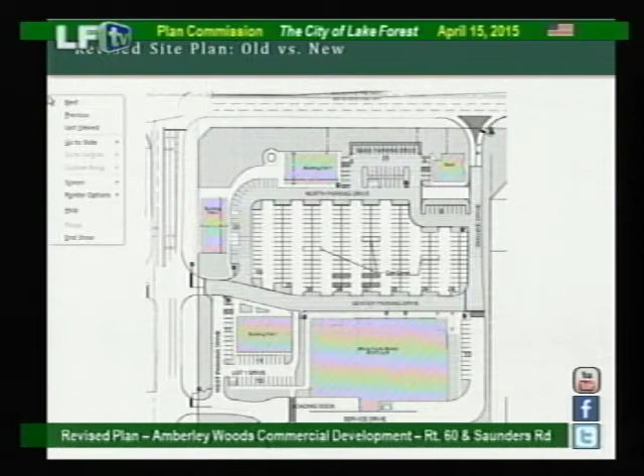This is the new plan. As you can see, much less dense. Originally 5 buildings, we now have reduced that to 3. We've also reduced the square footage by 10% of the GLA, to 62,793 square feet, a reduction of 6,697 square feet. The most contentious issue, as I mentioned, was a 42-foot setback from the property line to the parking area and a 60-foot setback from the property line to the building.

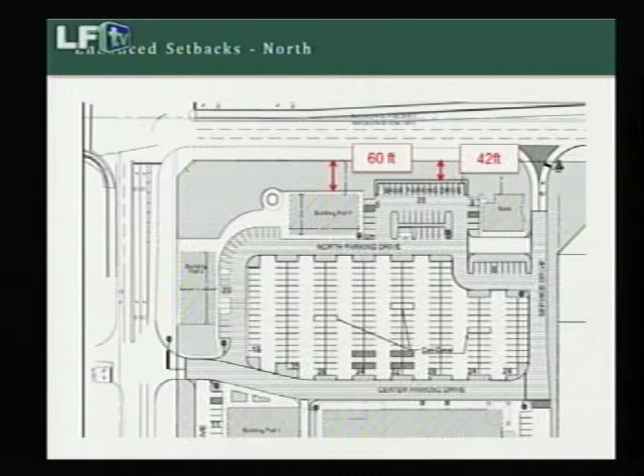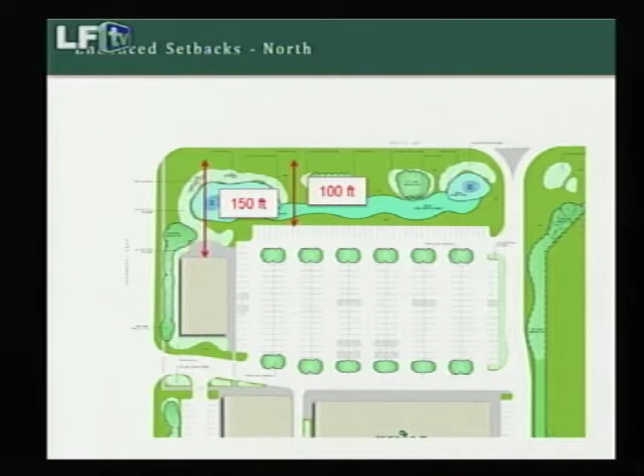The rear elevation originally was going to have 22 feet from the property line to the service drive, 47 feet to the rear portion of the building. We now have 50 feet to the rear portion of the building, and the service drive is now curved, with the setback ranging from 14 to 60 feet along that southern elevation.

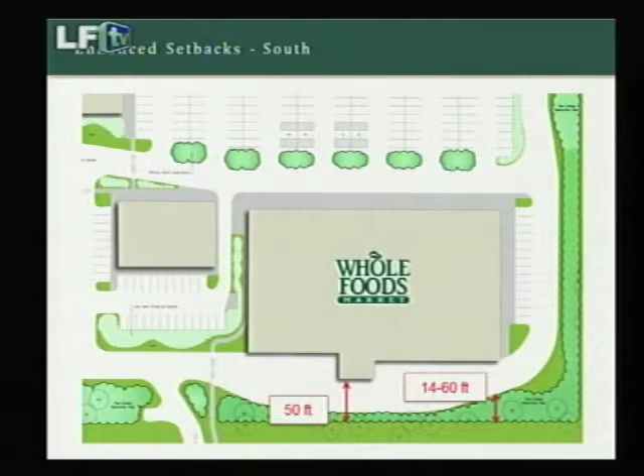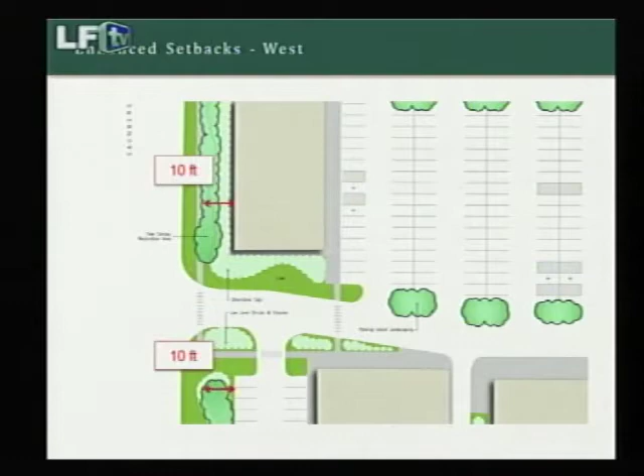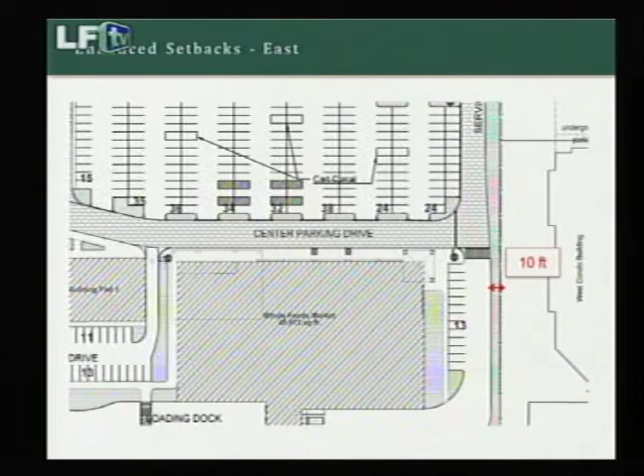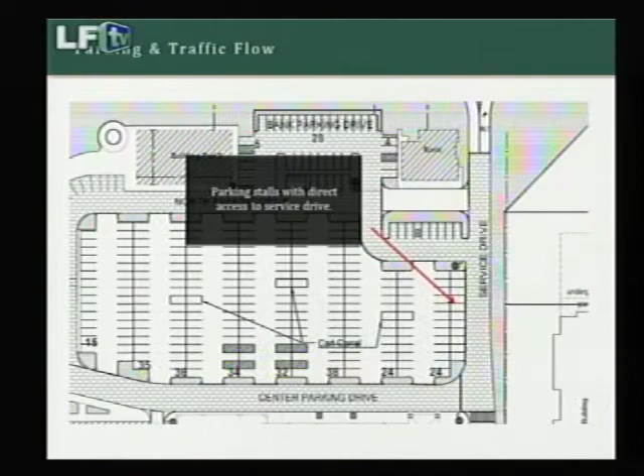Note also that the original plan had parking stalls along the service drive with direct access, which would have allowed vehicles to back up into the service drive, causing traffic congestion. We've now added a landscape island on the outside of that parking row to improve traffic flow and keep that service drive flowing freely.

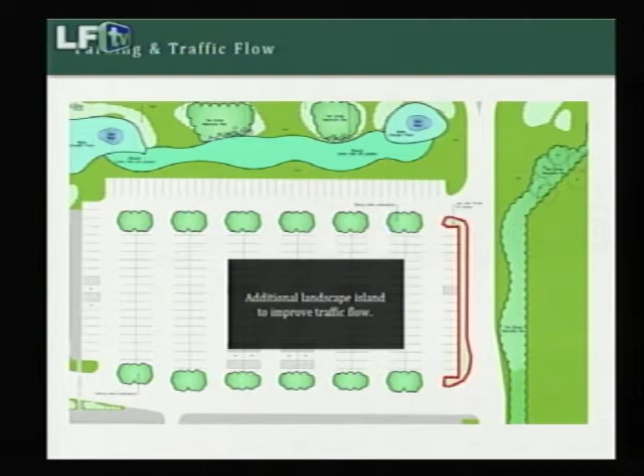We're proposing, in keeping with the last recommendation, that there would be a restricted access gate with a turnaround accessible for drivers approaching from Amberley Court. That gate would only be accessible with a fob key provided to residents of Amberley Court in the new homes that would be built, as well as in the neighboring condominium.

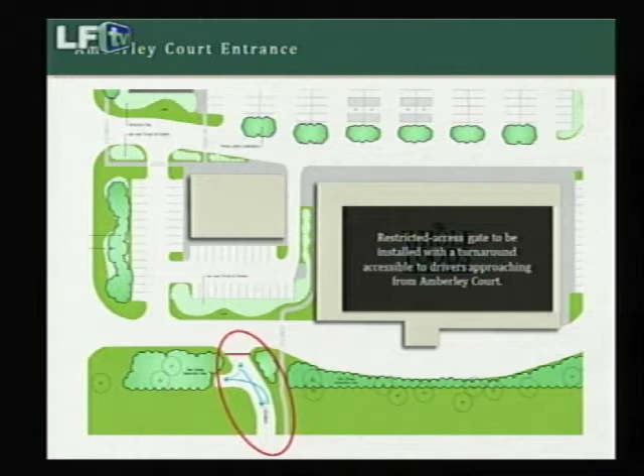That's a private street right now. It's anticipated that it would also be used by construction traffic during the construction of homes. But we also want to point out that we've provided for a cul-de-sac in the event that, after completion of those homes, the city determines that the gate is not functional.

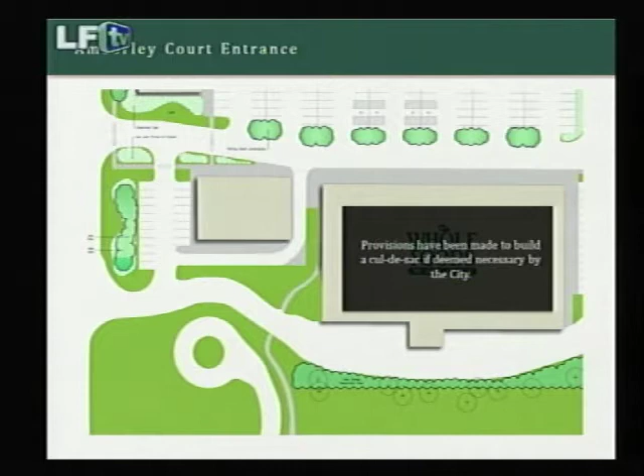So this cul-de-sac is not our preference. We lose a little bit of parking here, but it's being accommodated entirely on land that we own, and so this is something that would be an option somewhere down the road.

We also want to highlight that we've enhanced the landscaping and tree preservation pretty much all over the site, including 2 dedicated tree canopies along Route 60 that would allow trees to grow on Route 60 and keep foliage along that route.

Very importantly for a retail development, we've preserved view corridors by concentrating those trees in certain areas. This is an important consideration, that we can keep the tree canopy more lush than it was originally proposed, but also keep view corridors from Route 60 for the benefit of the retailers.

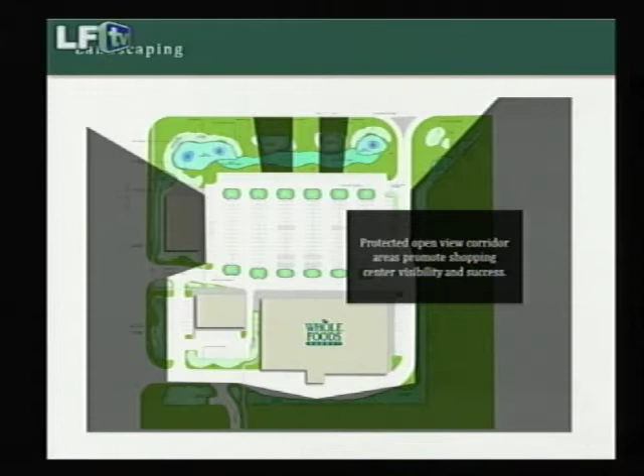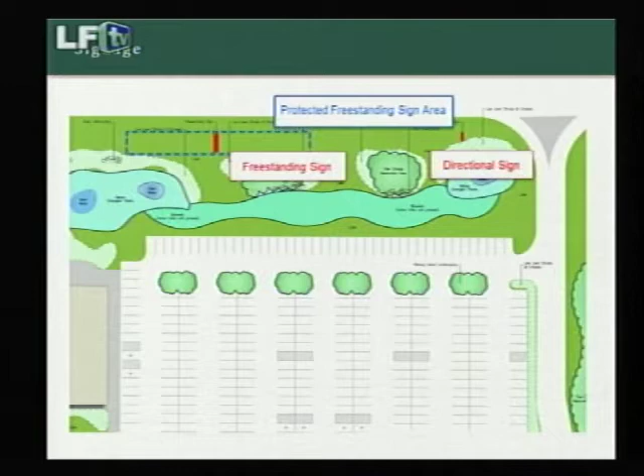The last consideration is signage. We're proposing one freestanding sign along Route 60. We've created a building envelope, and we would work with the city to decide the placement of that sign. That sign would be designed in keeping with the standards for that strip and with this zoning. We've also got a directional sign close to the right-in, right-out access off of Route 60, and another directional sign on the west entrance off of Saunders.

Those are all of the conditions that were suggested and that we've addressed. Happy to answer questions if you've got any.

Thank you, Chairman Lay. Just as background, in July of last year, the City Council heard a recommendation from the Plan Commission in support of this project with a number of conditions of approval. The City Council made it clear that they supported commercial development of this site. Just a reminder that this site, as it sits today, is approved for development with office buildings, so it's a site that we already know would have significant tree loss and significant impervious surface.

Since July, the developer who was at the forefront of this petition indicated there was no interest in presenting a revised site plan in response to the conditions. Since that time, the city has been in contact with the property owner. Several months ago we were put in contact with Pine Tree, and as a result you do have a revised plan in front of you tonight.

Since you already forwarded a recommendation, the City Council could have simply kept this petition at their level, but they felt that review of the site plan, because it is a land use issue, was important to be done by the Plan Commission. So they are forwarding this to you with the request that you review the conditions you previously recommended and evaluate whether this plan satisfies those conditions to a satisfactory level.

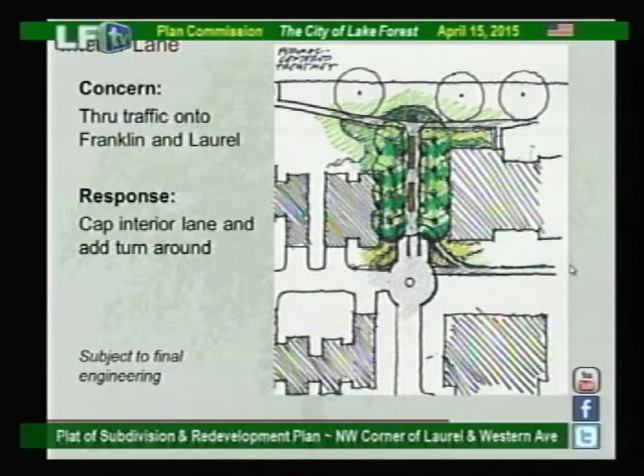The data from our traffic consultant finds this scenario somewhat unlikely, and we prefer the through lane from a planning and logistical standpoint. However, we did want to provide an alternate design that caps the interior lane with a turnaround instead of exiting onto Franklin, preserving pedestrian access by providing a similar formal promenade to the one we have on the east side of the site onto Western Avenue. We're still working through the engineering of this option, but wanted to offer it to the commission and the community as an alternative.

Another concern from the March meeting was about the size of the 4-story building, and how the height and density of the development would actually feel in the neighborhood. So we studied density, considered opportunities for height transitions, and modeled height to get a sense of the impact to the streetscape.

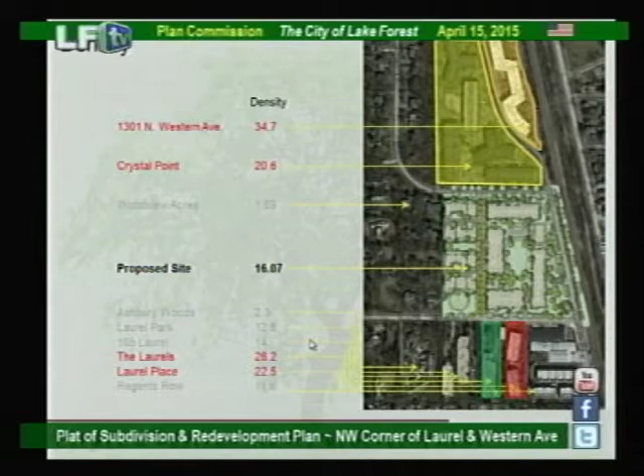This is a slide we presented at the last Plan Commission meeting. With 172 units proposed over 10.7 acres, our density is just over 16 units per acre. This is well within the context of the neighborhood—to the north, 34.7 units per acre at 1301 North Western Avenue and 20.6 units per acre at Crystal Point; to the south, the Laurels and Laurel Place have densities of 28.2 and 22.5 units per acre. So density is not the issue here.

Let's look at height. We studied several ways to drop the 4-story building to 3 stories while preserving the economics and scale necessary for the building and apartment product.

We could go to 3 stories by extending the building north, either consuming or not consuming the amenity building. We felt this made the building much too long, and with every building on site at 3 stories, it didn't achieve the richness that a mix of heights provides and that we originally intended.

We also considered going to an L-shaped building and jogging the footprint out into the 140-foot setback at the southeast corner. We found reducing height at the cost of public open space was unacceptable.

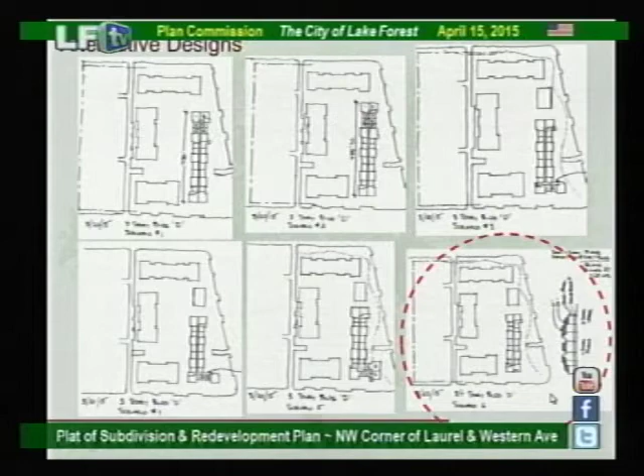The one alternative that worked was a tiered design, stepping down the wings of the building to 3 stories at either end. This approach maintains the original character of the design and the amount of open space, while softening the height at the ends of the buildings. So we modeled this alternative alongside the proposed 4-story buildings to gauge the impact to the streetscape.

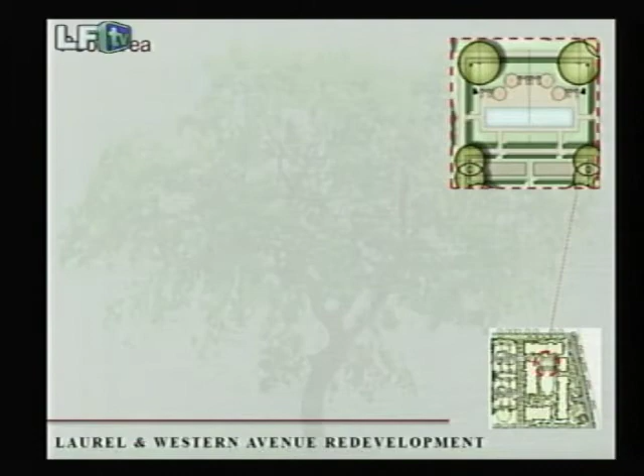To quickly touch from the interior of the site on the pool, we're proposing a pool as part of the outdoor amenity. When we say pool, we're envisioning a 75-foot, 2-lane lap pool, a minimum depth pool with a dark bottom that will look like an elegant estate pool, as seen here.

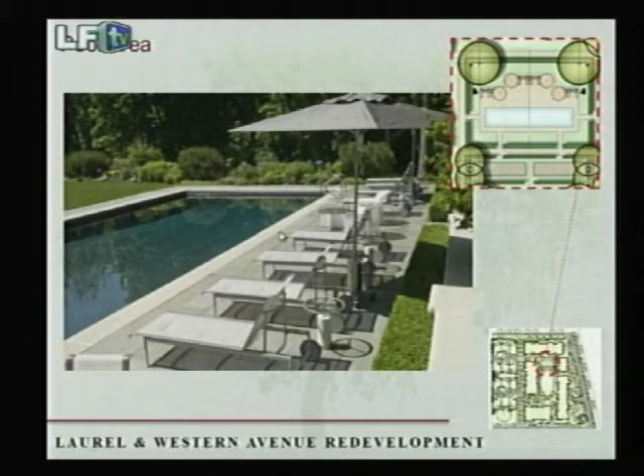We wanted to provide some information as to what the pool looked like in the off-season. Here you can see we've covered the pool with wood planks and provided a couple plantings on top to show that it's not just a stretched tarp over it, and there's some elegance that it preserves to this area.

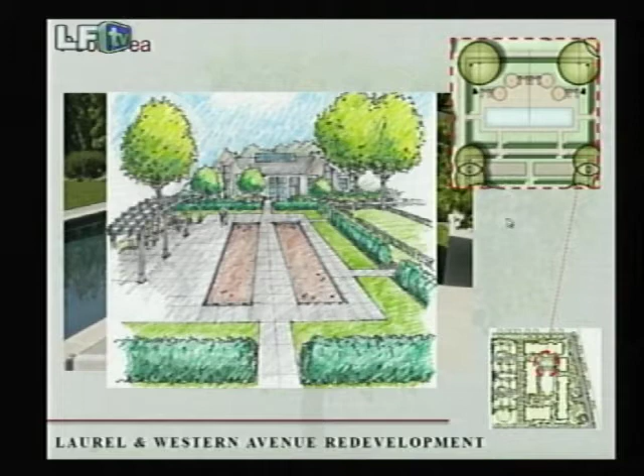We also wanted to share a no-pool scenario where we would move the bocce courts from the north end of the site down here into the pool area and then just extend the great lawn. These are just options in response to questions we heard.

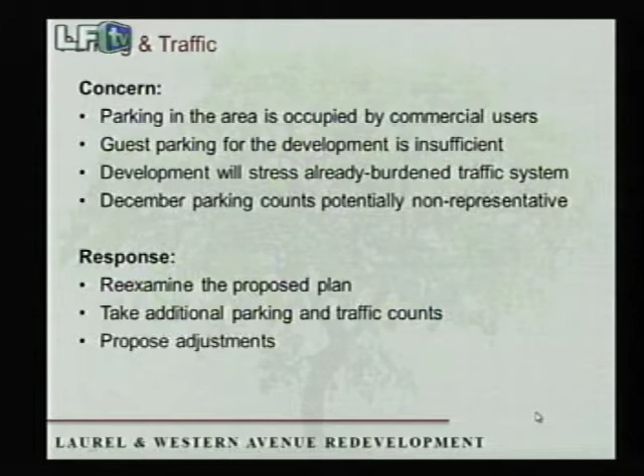And then finally, we turn to parking and traffic. We heard questions from the community about how the development will impact traffic and parking in the area, concerns that the parking is needed by adjacent commercial buildings, and that traffic and parking counts captured in December were not necessarily representative of true conditions, since many people vacation in December. In response to these concerns, we re-examined our proposed parking and took additional parking and traffic counts in March to see if we need to make adjustments.

For the condos, we're providing 36 indoor spaces and 6 outdoor spaces for the 18-unit building. For the 24-unit building, we're providing 48 indoor spaces and 8 surface spaces. This is a total of 98 spaces proposed for the condominiums, while only 89 are required, so we are in excess of the code requirements for the condominiums.

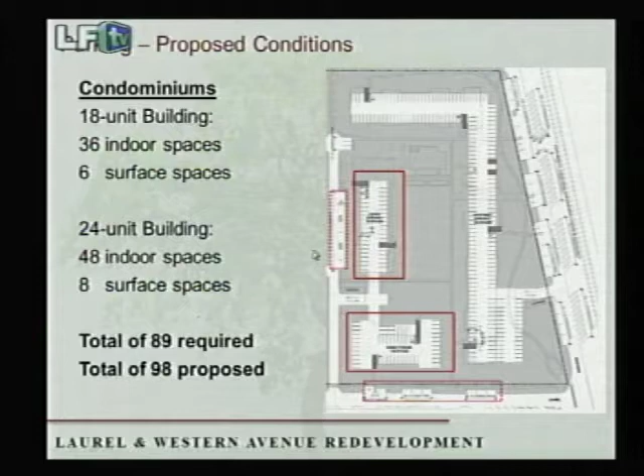For the apartments, we're providing 192 indoor parking spaces under both buildings and the amenity. We're also improving the existing 42 spaces on Western that are already there and adding 17 new spaces, for a total of 59 improved spaces being funded through this development. The question really is, can parking on Western Avenue serve both the district and the development?

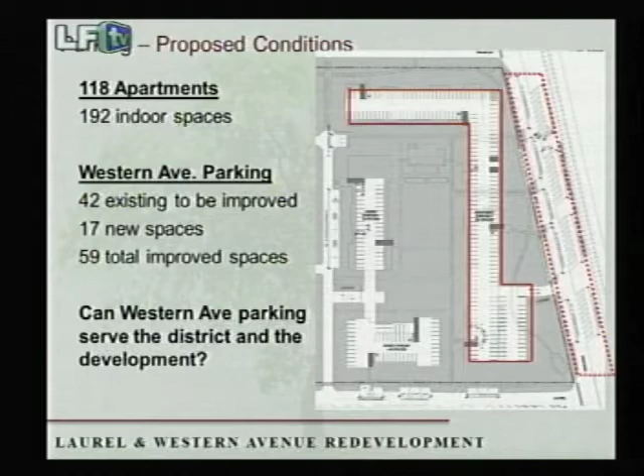To answer that question, we'll re-examine the data from our parking study. The original study was done on a Thursday in early December. It took counts between 11 a.m. and 6 p.m. and found that of the 190 spaces in the district, 39%, or 75 spaces, were occupied at the peak period of 1 p.m. So over the course of the entire day, the most occupied hour was about 1 p.m., and only 75 spaces, or 39%, were occupied.

After the last meeting and in consultation with city staff and our engineering consultant, we sent KLOA back into the field in March to study demand in spring versus winter. They expanded their scope to cover a weekday and a weekend to understand the patterns, and extended the time to 9 p.m. based on feedback that they should capture additional parking impacts during the dinner hour. KLOA found exactly the same peak period for the Friday count as the December Thursday count, with a peak period at 1 p.m., 39% or 75 spaces occupied.

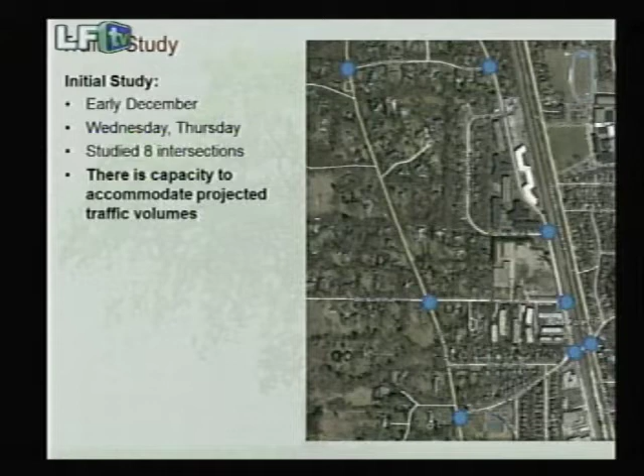Similarly, KLOA consulted with the city and went back to the field to study traffic conditions at the Woodland, McKinley, and Western intersection to gauge whether there was a perceptible difference between the data captured in December and the conditions in March. They again extended the counts into the weekend, and found that the March data largely compared to the December data, confirming their initial finding that there would be no significant impact from this development to existing traffic conditions in the area.

We have KLOA here tonight to answer questions, along with members of our design team. We have additional information to share, but thought we'd stop here to provide ample time for the rest of the evening. Thank you.

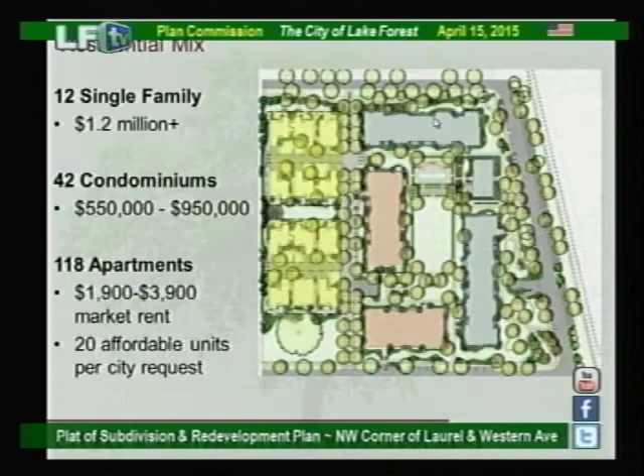Since we're using the replacement of Franklin Park as one way to satisfy the RFP treatment of Franklin Park, we wanted to provide a design that was more reflective of what Franklin Park currently looks like. Franklin Park currently has a curvilinear sidewalk that meanders through it and around it before it wraps back around and heads back west on Franklin. We thought that curvilinear aspect was desirable, changed the feature of the site, and made the exterior pieces seem more inviting and park-like. As we carried Franklin Park down to Laurel, it seemed appropriate to carry that treatment with it.

We are really providing this as an opportunity to integrate the site with the community and have people enjoy the incredible amount of landscaping and the park-like setting we're providing. So that's a little bit about why we chose the curvilinear expression and meandering path - it's a park-like experience that's more reflective of Franklin Park today.

Okay? Well, thank you. Yes, of course.

I've got a couple of questions - it's more of a day in the life question. Could you walk us through just an average apartment dweller driving in for the day and coming out, and also when they move in, when they move out, garbage delivery, all those daily functions, and how that would fit for the different types of uses, the apartments as well as the condos, because those will take more traffic than the single families.

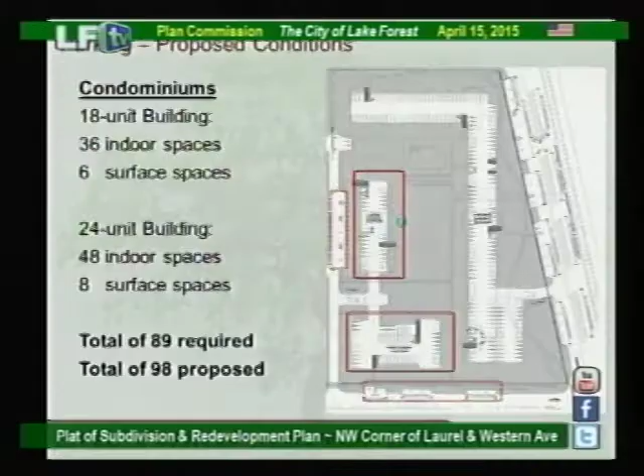We'll start with the apartments. As I had mentioned previously, going down to the parking plan, you can see we have a significant underground, fully enclosed, heated garage that serves residents in the apartments. Ideally the person is parking there at night, leaving in the morning to go to work. They would leave through the ramp that exits onto Western. This ramp was previously shown off of Franklin; it was relocated to reduce traffic impacts on Franklin, to Western. That's the only entrance and exit for the parking structure for the apartments.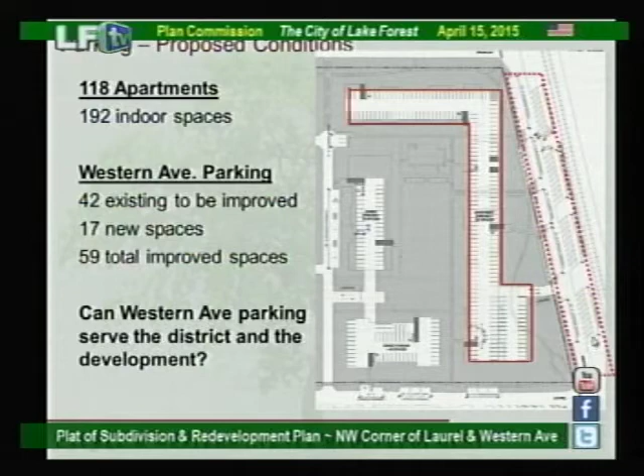So somebody will leave this ramp, head either north or more likely south to the city center, if they're driving. We think there's going to be quite a few commuters here, in which case they would leave through the front door and continue south perhaps to the Metra stop in the heart of town, or if they're running out for an errand.

So we've added some arrows here to indicate primary and secondary access points of the buildings. We've located those relative to the amenity center, which we're providing as an amenity for the renters.

The primary amenity includes a fitness center with a couple machines, a Pilates area, and a yoga area. We'll include on-site leasing and property management, so we'll have a building engineer there who fixes things if things go wrong. It'll also provide a great room, an event space, changing facilities, and bathrooms to serve per IDPH requirement for the swimming pool we're providing, and some nice outdoor patio space as well - so you could host a party there, or just grab a cup of coffee while waiting for someone.

We'll also provide package delivery, so when somebody gets a package from Amazon or a clothing store, the staff there will take it and log it, and it will be there waiting for the residents.

The primary entrance for the 3 to 4 story tiered building is right here where the cursor is, close to Western at one of the closer points to the street. The secondary entrance point is at the opposite end of the building on the southwest corner. As a resident here, they're really going to be utilizing the interior vertical system more than anything else to commute between the parking space and their unit.

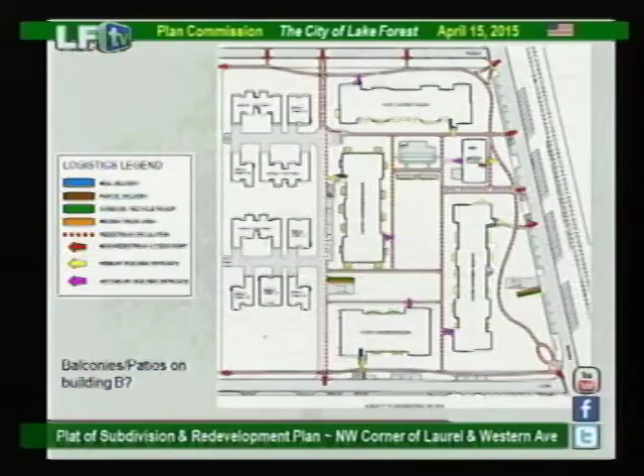What we've anticipated as phase one includes the entire apartment complex, so all the underground parking, the two buildings, and the amenity area, this first two-story condominium building, and one of the two clusters of single-family homes that's further north. The site is kind of split, as you can see on the cursor, so phase one takes all of the buildings and public improvements and green space and landscaping associated with a large majority of the site. We think we would be able to obtain financing for the apartments quickly, including a construction loan, and we shouldn't have any problem launching those.

The condominiums will likely have a pre-sale requirement, and we haven't been negotiating with lenders just yet, but once we've sold a handful of units we would be able to proceed with construction of those buildings. Phase two, similarly, is the second cluster that's further south, and the three-story, 24-unit condominium building, which would again have pre-sale requirements. It would go with the market as the market unfolds and homes are purchased.

So that first phase you mentioned, the apartments, one of the single-family clusters, and that condo building, would that all be built within what, a 1 to 2 year period, 2 to 3? Probably somewhere around 18 to 20 months, so under 2 years. So 1.5 to 2 years.

Correct. Your written report talks about your preliminary market feasibility study, which I take it is the foundation for the answer you just provided. Have you done a final version of that preliminary feasibility study? We haven't finalized it. We've been waiting to lay out floor plans before we go for a final. We do intend to finalize it, and we think the market in this area is only getting stronger. We'll probably have it finalized as soon as we're through the approvals period, to the extent that building locations are set, the unit count's set, and we can proceed in the design phases.

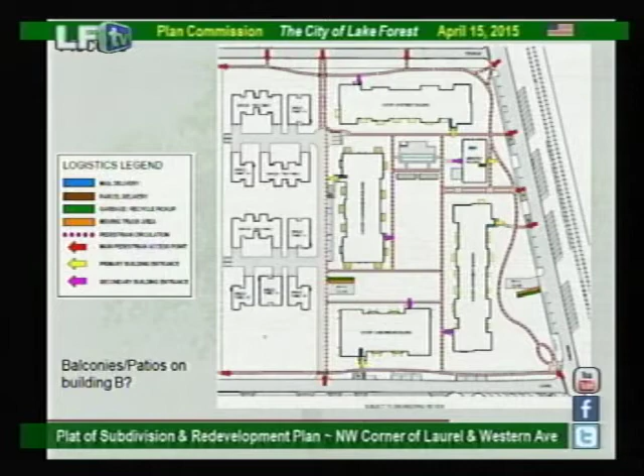So, last question, when do you expect the second single-family cluster and the two-story condo to be complete? We were originally pegging full completion for the end of 2017. Our hope is that as soon as we get enough pre-sales it will trigger construction of the first phase of the for-sale product, and as soon as those units are occupied or sold, we'll roll right into the second phase. We'd love to get this done in as tight a time frame as possible, in a way that preserves the integrity of the site and the demand.

Okay, thank you. Other questions? Yes, Mr. Chairman? If I may?

I'd like to ask the petitioner, going back to the parking map, about the access to the parking garages for the apartments - there's one entrance and exit, 192 spaces.

That's correct. Let me call up KLOA - they've reviewed our parking plan and have more technical expertise to lend to that question than I will. Bill Woodward is here with us from KLOA.

Hi, good evening, my name is William Woodward, I'm with KLOA. Can you repeat the question? Yeah, there's one entrance and exit to the 192 parking spaces under the apartment buildings. Correct. Seems like maybe not enough.

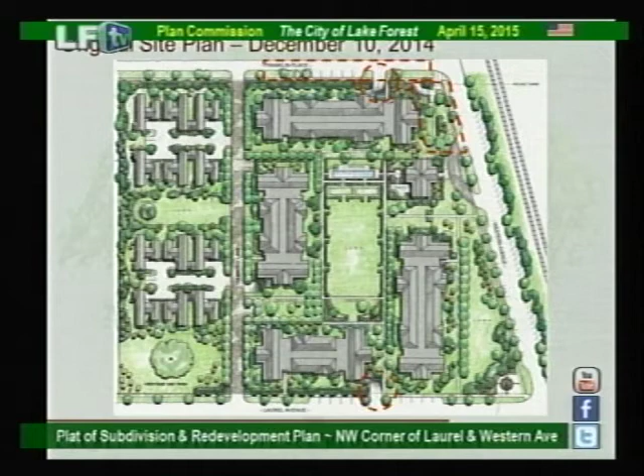Would Franklin have to be widened at all, going to Western, or no? No, widening Franklin was something that was contemplated in the original design guidelines, as well as adding parking. So our original scenario, Franklin is at the same width. But we did introduce parking along Franklin, which we summarily reverted back to, maintaining the original streetscape. Okay, thank you very much.

My pleasure. I'd like to follow up with a question on the apartments. Based on your experience with other projects that you've constructed and operate, and observing other similar size projects, looking ahead 5 to 10 years, what might you see as the probability that there would be a conversion of apartments to condos?

Well, I guess I don't have a crystal ball, but what I can say is, to Kathy's point earlier, there is no institutional grade apartment product in Lake Forest, and our market study and current brokers feel that this is going to be highly desirable as apartments. The monthly rents that we're commanding here are large, but within reach, and it's hard to determine whether or not that revenue stream would be what owner of the building would want to walk away from, the revenue stream of apartments, and go to a condominium conversion.

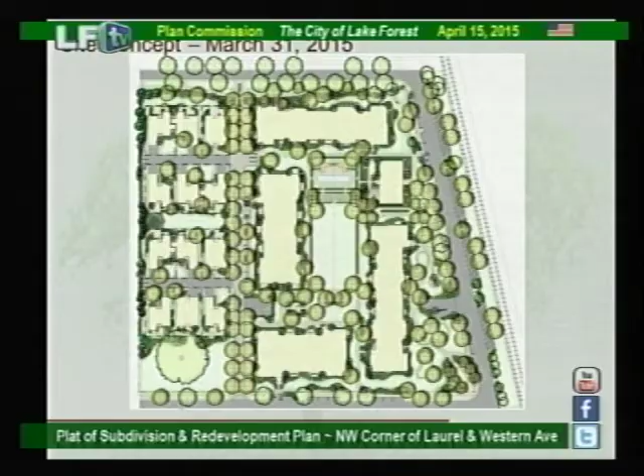And I'm not sure, Tim, do you have anything to add to that? I agree. Having gone through 2008, 9, 10, like we all did, I think we don't have a crystal ball, but certainly apartments that have a 9-foot ceiling and have the finishes we have are convertible. There's a conversion possibility. There's no intent here along those lines or blueprint, because we just don't know. But it's happened before, and it could happen again. Okay, thank you.

Other question? Yeah, I have another question about, do you think at these price points and the focus groups you've looked at, what's their feedback on the outdoor amenities, like the pool? And do you think those are really assets in this community? Do you think those actually might be somehow potential negatives? I mean, particularly if you're mixing apartments and condominiums, I'm just wondering if having that pool there establishes sort of a backyard look to this.

Where you have on all of these buildings, the interior rim is all people's front windows, dining rooms, etc., and they're going to be only accessing those for the most part through underground parking and elevators and long hallways. And they're going to be having dinner in these units, which they're hoping are going to appreciate over time. And they're going to be looking out while they're having dinner, and there's going to be a bunch of people swimming in a swimming pool. And I'm just wondering if that's actually going to be helping the success of the development.

And I'm wondering if maybe those elements, because I've had discussions with developers in town before, and that subject came up, and they just very coolly dismissed it. They thought it was actually a bad idea, that people in this town will probably belong to some kind of clubs, or particularly maybe our upscale health club or things like that, to where they would consider the pool to be an undesirable element. And not that they're snobs, but I'm just wondering if perhaps you should incorporate that building's functions maybe inside the apartment complex. Did you guys have discussions about that and do some studies?

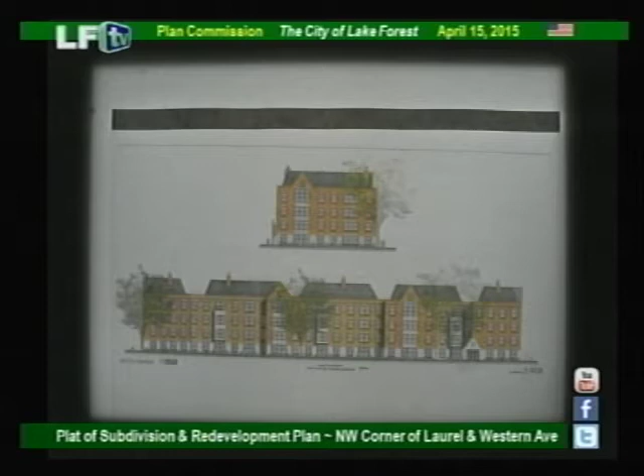I am showing you these pictures to illustrate that what is planned for Lake Forest is not so different on the outside from these repurposed textile mills. It's not compatible with Lake Forest housing standards and will detract from the beauty and value of our community.

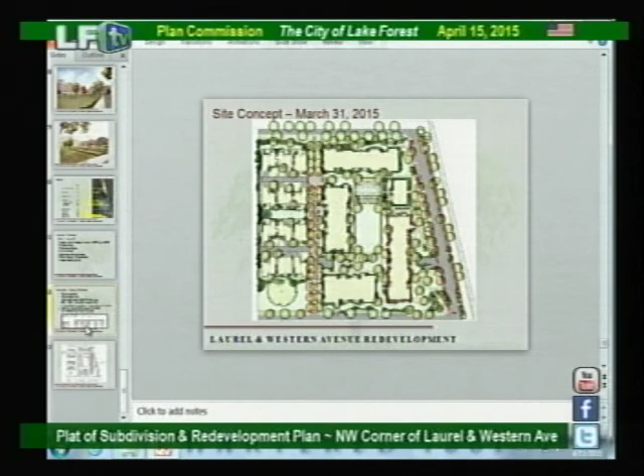I apologize, but so the range is from $1,000 to $1,700? Yes, that's correct. So we're providing 1 and 2 bedroom units per the request of the Lake Forest Housing Trust and City Code, with affordability between 80% area median income, which is dictated by Lake County, and 120% of area median income. Area median income in Lake County is just over $72,000 per year. So the income ranges we're serving are $40,500 and $46,300 on the low end at 80%, up to $60,800 and $69,500 at the 120% level. The rent ranges would be from roughly $1,000 a month to $1,700 a month.

Thank you. I don't have any additional questions.

Floyd? Yeah, I was just reading through some of the correspondence, and one question did strike my fancy. It might sound trivial, but he noted there are no balconies on any of these buildings.

That's actually different, not true anymore. Previously, the elevations the gentleman showed were from a design about a month to six weeks prior to today. In the packets we've submitted for tonight's discussion, you can see that on the apartment product we're providing Juliet balconies and first floor patios in every unit. And on the condominium product, if I can find a good photo, here we go, we have balconies on the second floor, which are masked here by trees, and the third floor. So we'll continue balconies and first floor patios that are accessible balconies for the condominium product, and Juliet balconies for the apartments. Okay, thank you.